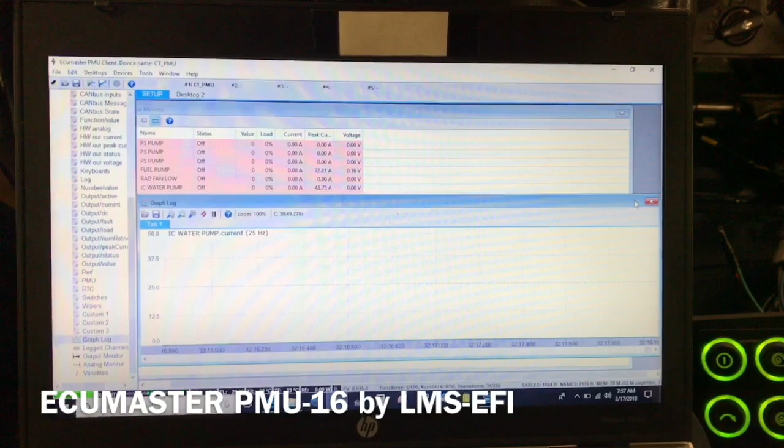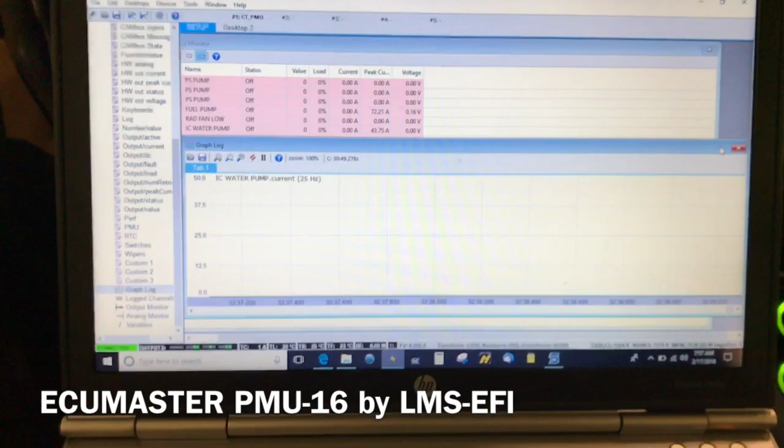Okay, we're having a little play with the ECUMaster PMU-16 today. I've got the software open here on my laptop. We're sitting in a 3rd gen RX-7 that we've been working on for a little while now. This car is using that PMU-16 power distribution module. We also have the ECUMaster switch panel here. We don't have it mounted yet, so excuse everything just kind of laying in here.

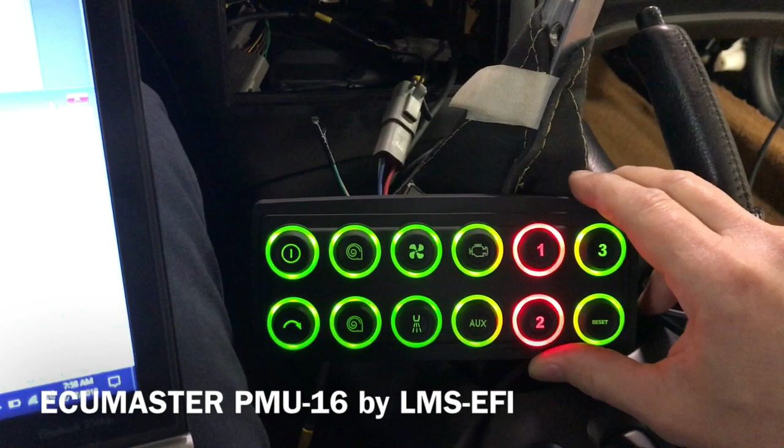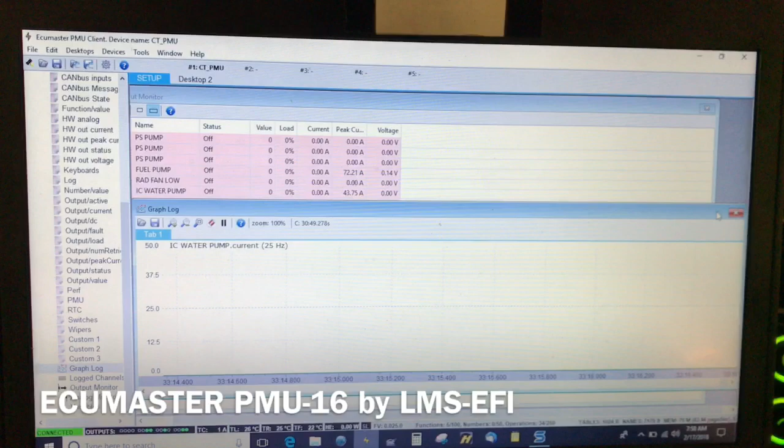We've been doing a lot of testing and just playing, really, seeing what features we can employ on this unit, and it's a pretty neat little deal. And I'm going to go over one of the features that we're using right now, and kind of how it works and what you can do with this software and this device. I'll try to pull this menu down. The laptop's not working. There we go. Pull this down, kind of zoom in here.

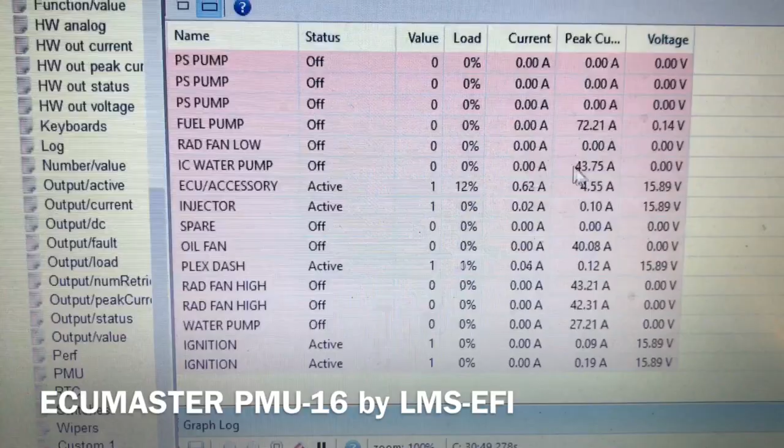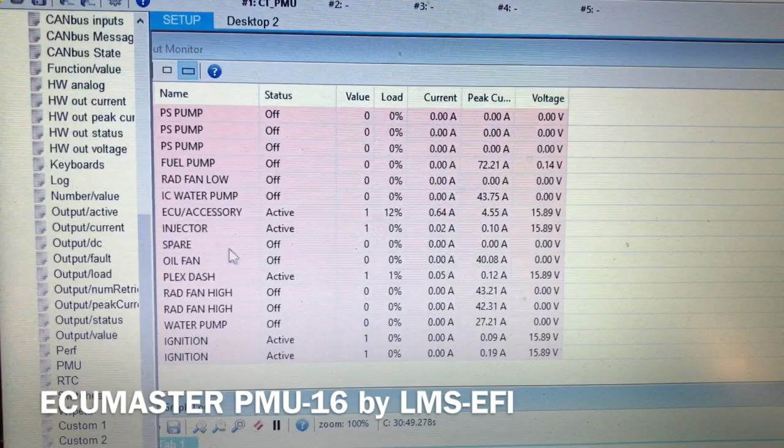You can see we're running a power steering pump, fuel pump, radiator fan, 2-speed radiator fan, intercooler water pump for water to air intercooler. Our ECU and accessories are on a circuit. Injectors, we've got one open there, spare. We've got an oil cooler fan, got a circuit for our Plex display dash, fan high, our electric water pump, and then we're running 2 circuits for ignition coils.

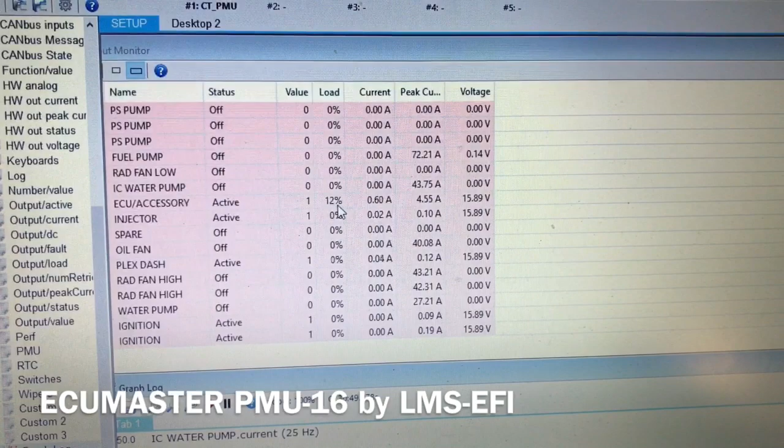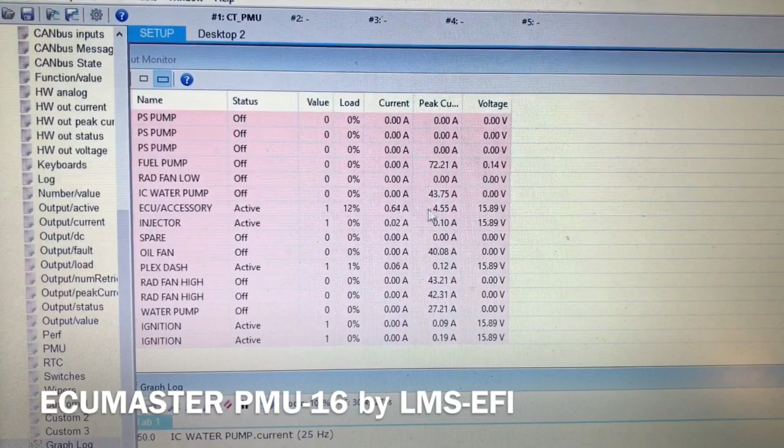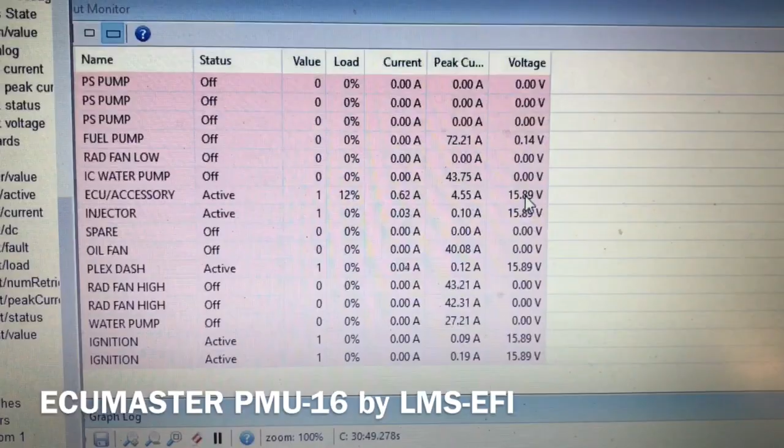As you can see, this will display whether or not the functions are on. See, active, off, the percentage of the programmed load that you're using. So right now, the ECU is using 12% of whatever the fused value that we have programmed, and you can see right now it's running at about 0.6 amps. Excuse me. And that's real time. Over here it's pulled a maximum of 4.55 amps, and it's running at 15.9 volts. I have a battery charger hooked up to this thing right now, so the voltage is hovering right up around 16 volts.

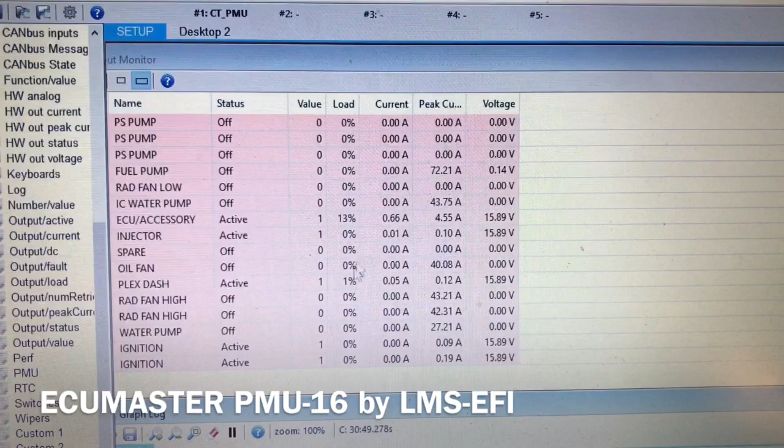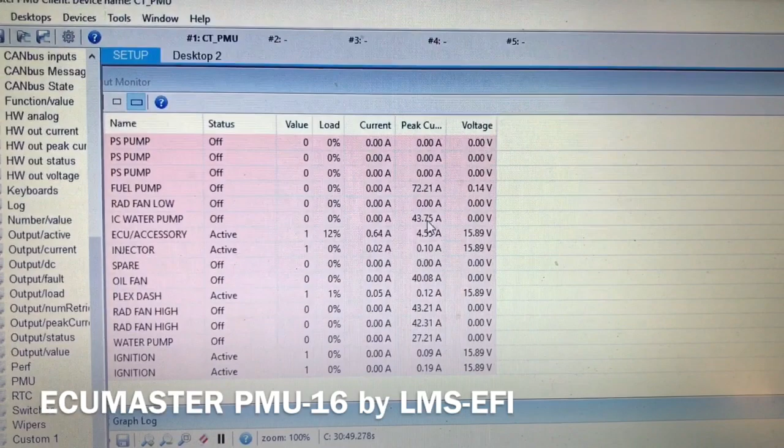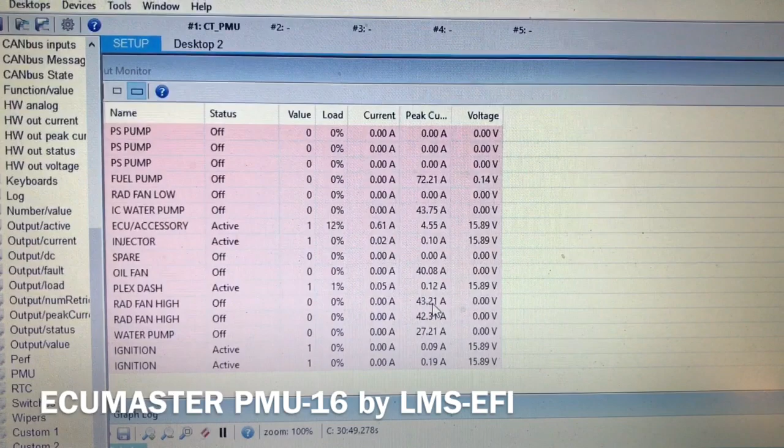What I'm going to show you, I'm going to use our keypad to enable the intercooler water pump, and as you can see, I have run that already, with a max of 43.75 amps, and that's inrush current. It doesn't run at that high of a current draw, but when you first turn it on, you're going to get a big inrush. And you can see the same thing up here with the fuel pump. The fuel pump primed and when it first came on, 72 amps of inrush. Down here, this radiator fan, we're using 2 25 amp circuits, so a 50 amp total continuous capacity. And on inrush, we got a little over 85 amps.

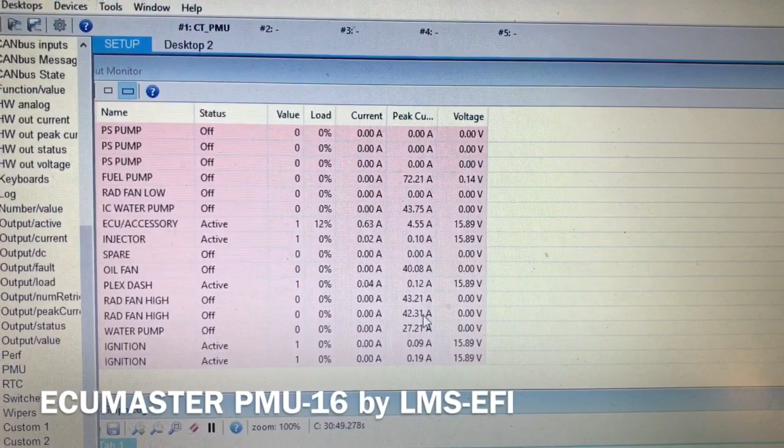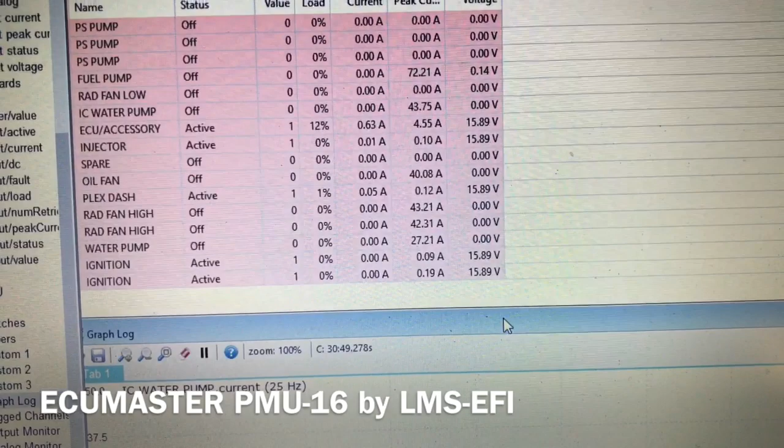Okay, so the inrush is big on these motors, and we can monitor that. The running current isn't going to be anywhere near that, but it's just handy to know exactly what these things are doing. So I'm going to pull this chart back up, zoom out a little bit here, and this is real time, and it's going to graph.

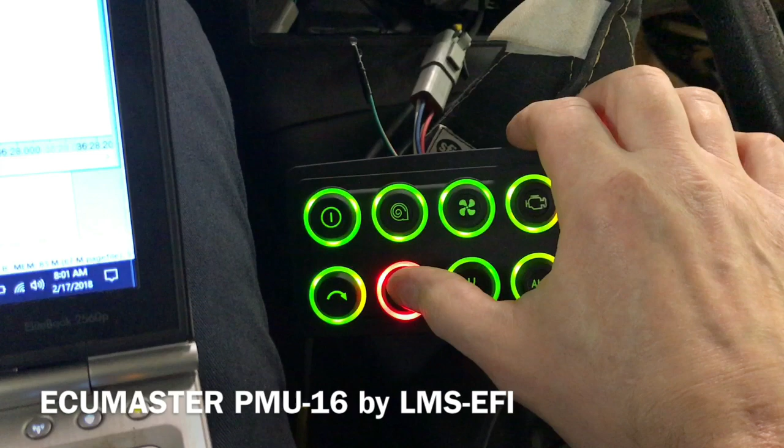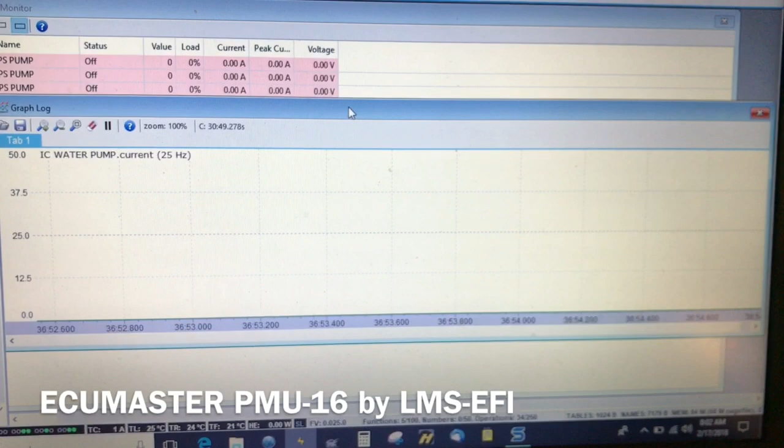I'm going to manually, over here with our switch pad, key this pump on and off, and you can see the state change on the keypad there. And I'm going to go back here, and you're going to see exactly what the real-time amperage does. You can see it spike up and then drop down and then go to 0 when I turn it off. And this chart, as you can see over here, is scaled to 50 amps. So again, I'll turn it on. We get our 40 some amps of inrush, and then the running current is very low.

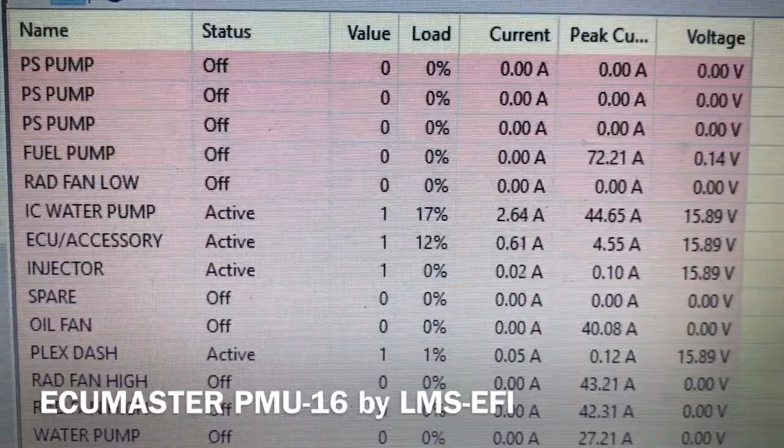Don't have any water in it right now, so that's not indicative of what this thing will do when you load it down with water. But then we can go back here and see that that IC pump is running at a little less than 3 amps. So big inrush, but the amperage drops right down. This pump, when I do load the system up with water, is probably going to run about 12-15 amps.

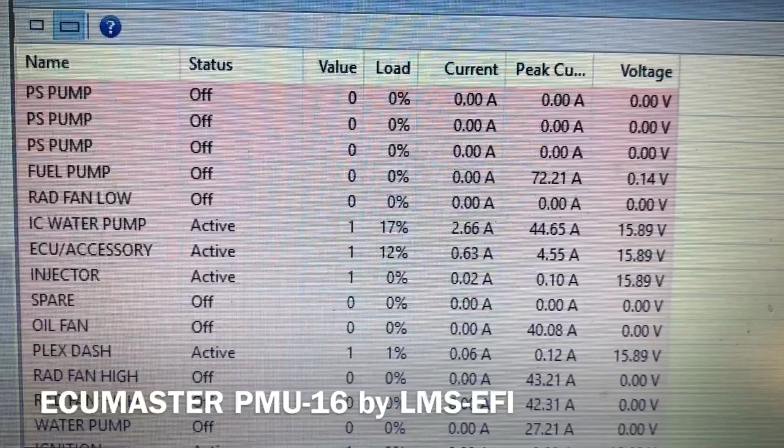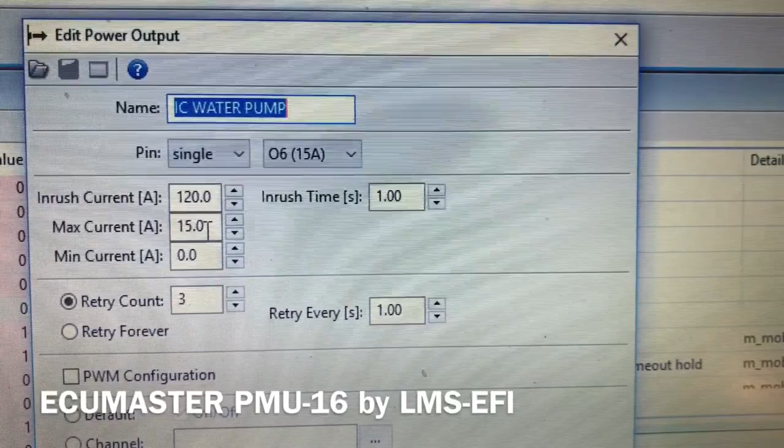And so then I'll show you here how we can control this. I'll go ahead and shut that pump off. I'll double click on this and our setup page for this function pops up. You can see up here that we got the IC water pump. We're using a single 15 amp circuit, and I have it fused for 15 amps. So if it draws over 15 amps, it's going to shut down.

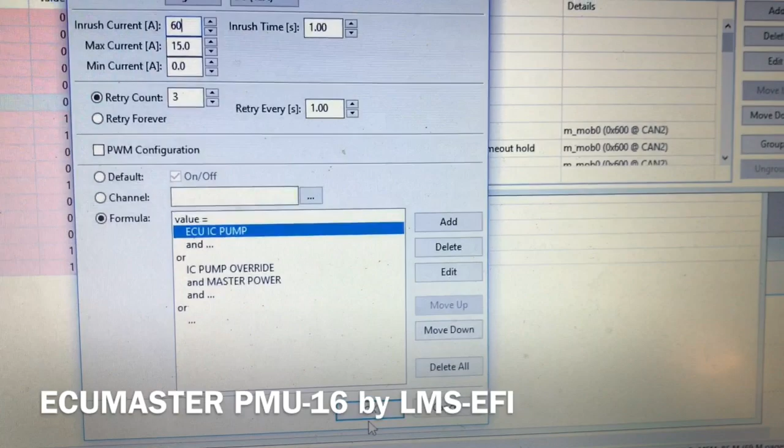We got 120 amp inrush set up. I'm going to go ahead and drop that down. We'll set that at about 60. Just to show you how everything's programmable. Go ahead and hit OK on that. Close that out. I'm going to bring it back up.

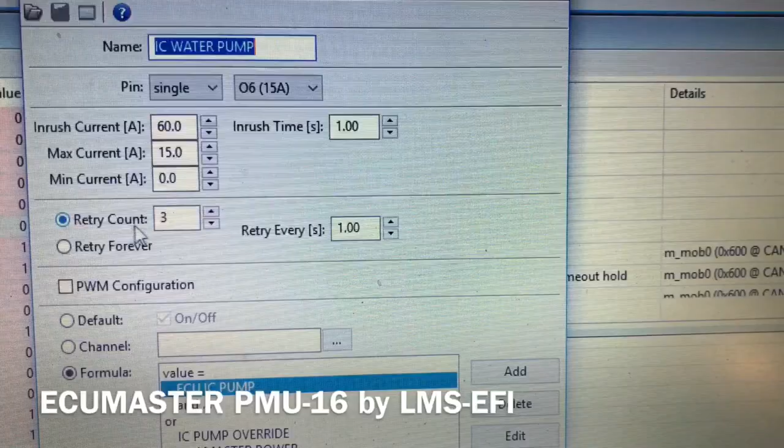Here we go. And the way this works, if you exceed your max running current, the circuit will go open, just like a fuse blowing. And then we have it set up to retry 3 times and retry every 1 second. So basically, if the fuse blows, it's going to replace the fuse, try the circuit again, and it's going to try it 3 times. And if after 3 times it still faults, then it's going to set a fault.

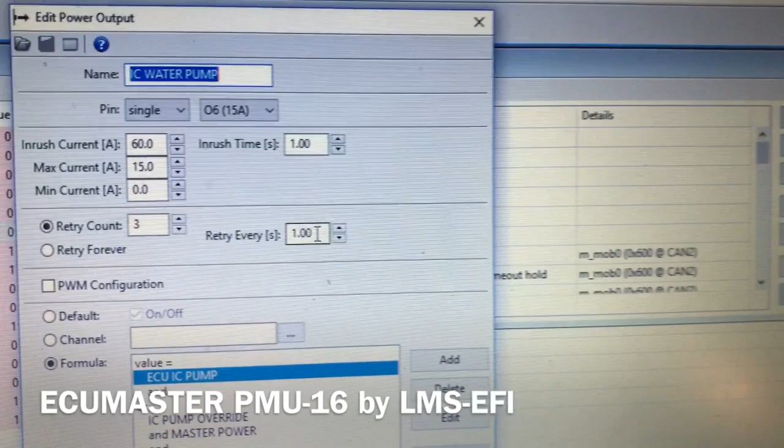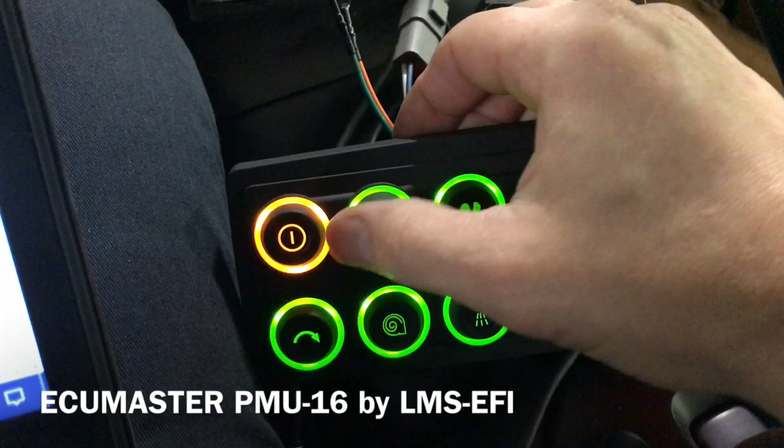The other things we have here, we have another indicator lamp here that is for again ECU faults, and this is more of a check engine light situation where you've got low oil pressure or something like that. These are manual override buttons, just like we had with our intercooler pump. Turn it on and off. And then this is a master power button. So when the master power button is off, the overrides are turned off. So that's how that works.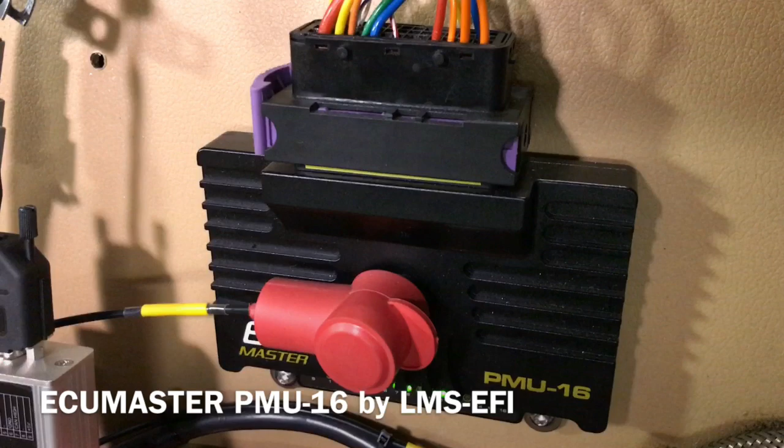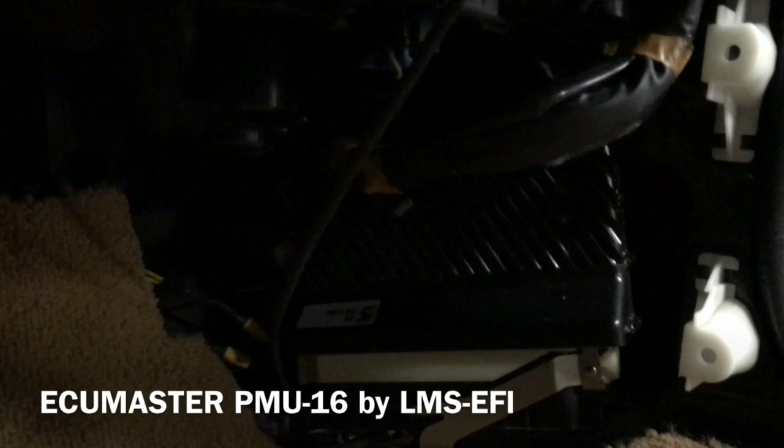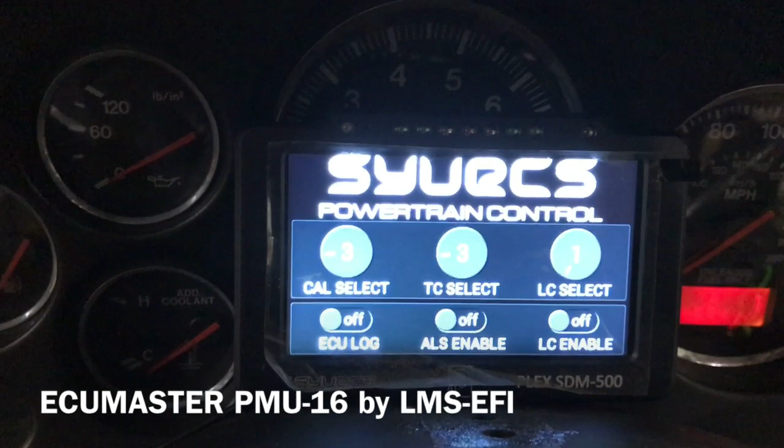And this piece here communicates with the PMU, and if you look down here, here's a little PMU power distribution module sitting right there. It's about 4.5 by 5.5 inches. Small little unit. Down here, if you can see, the lighting's bad, that's our Syvecs S8 ECU. And then come back up here, and you can see our Plex SDM 500 display dash. All of these units are connected via CAN bus.

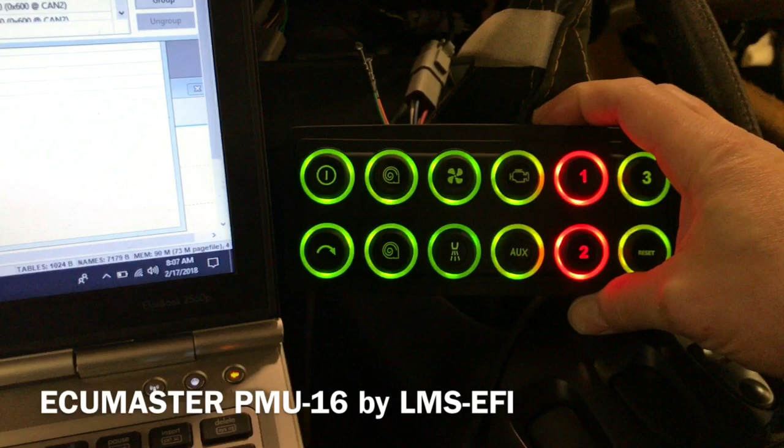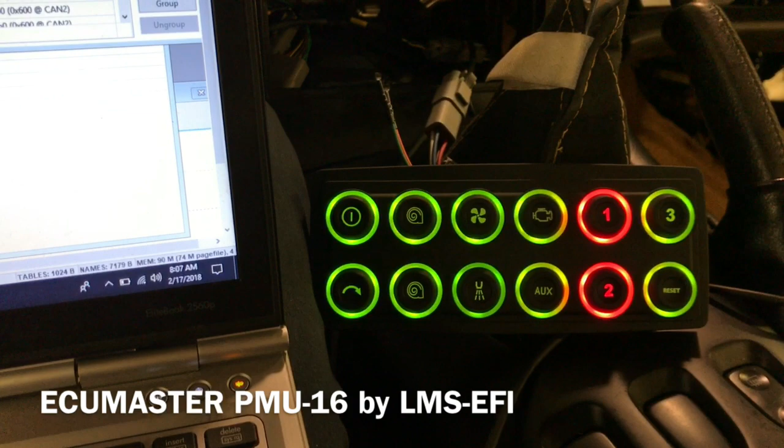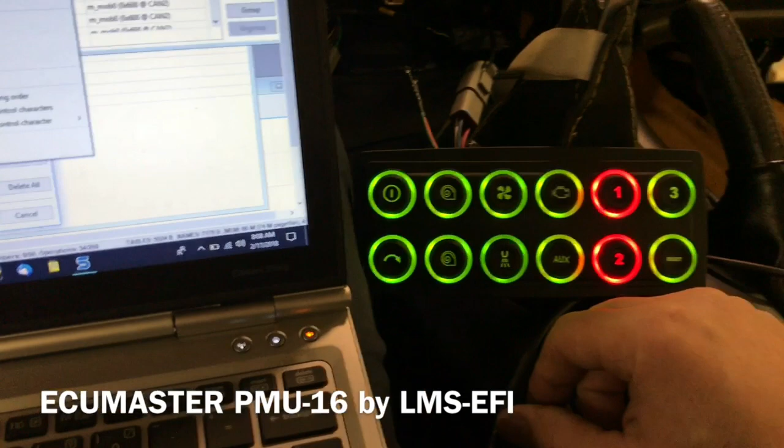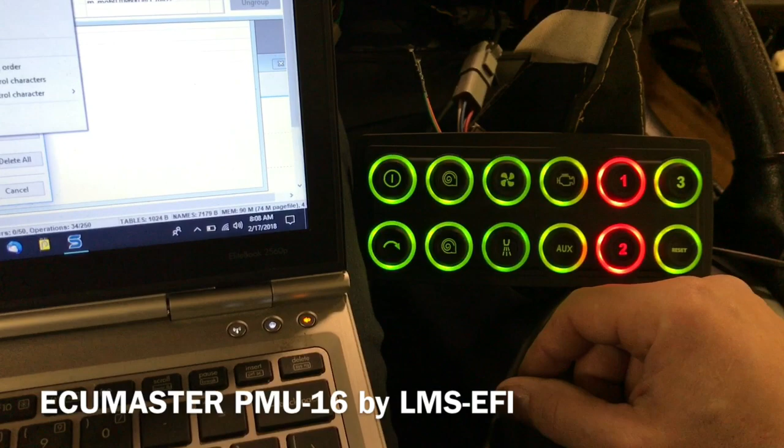The ECU features programmable CAN bus input and output, and so we can program what the ECU is putting out, and then the ECUmaster stuff can also be programmed, and the Syvecs stuff can be programmed. So we took some time, set up a CAN bus protocol where all three units can talk to each other. And so we have one set of sensors that feeds the ECU, the power distribution module, and the dash. And then we can set up fail safes and turn functions on and off in the PMU with the CAN bus objects.

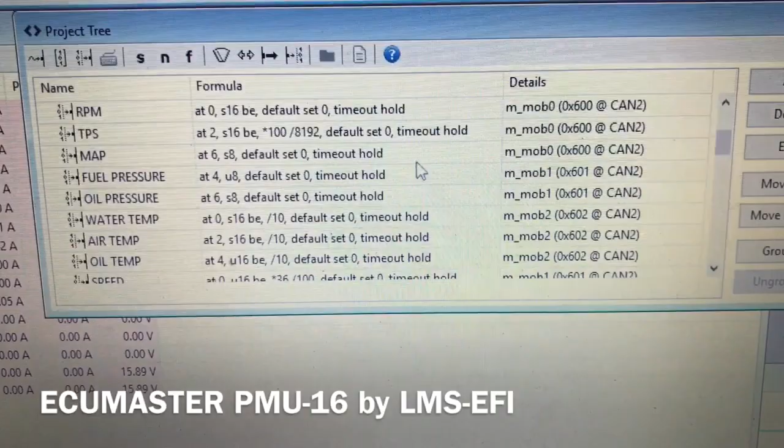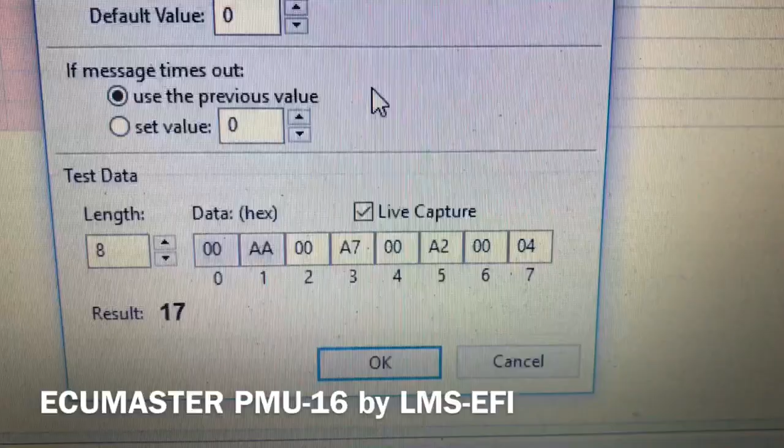And just to show you a little bit of how that works, we'll look at water temperature. Open that up and see the protocol here, I can set all that up. And another really neat feature about the ECUmaster PMU is that you get live CAN bus data, and so you can see down here exactly what's coming through on this channel and what all the hex information is in real time, and then this will spit out your output value. And right now we're looking at water temp, and we get a value of 17 degrees Celsius.

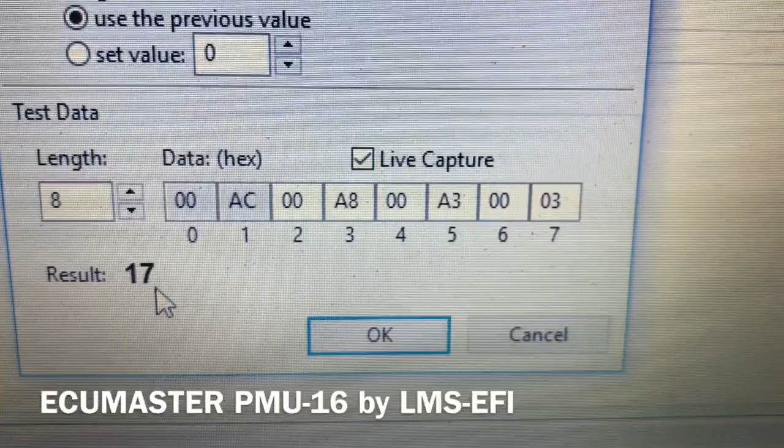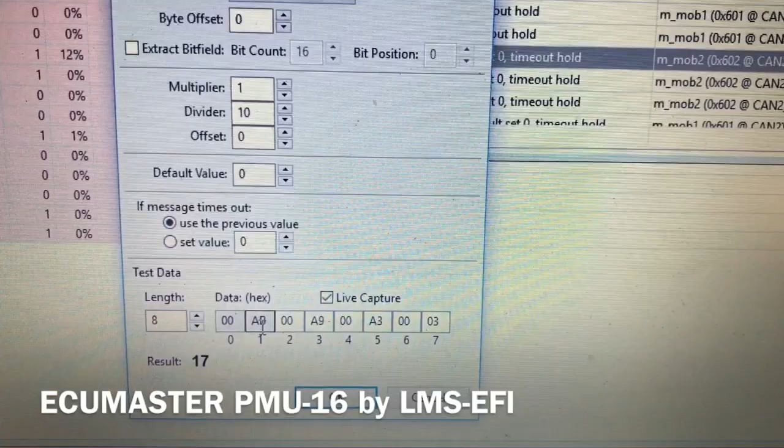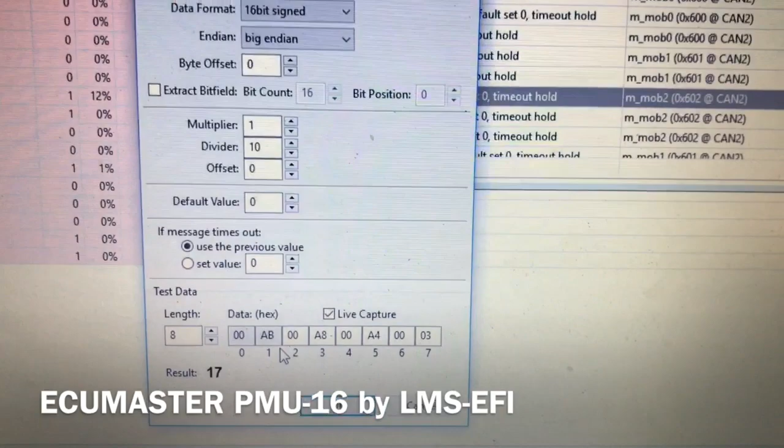So it lets you know exactly what you're reading. Actually what we had to do with the Syvecs was, we had the bit and byte information, but we didn't know exactly the multiplier and the divisor up here, how that was going to work to spit out the proper actual temp number. So playing with this, we can look at it and then come up here and play with our multiplier and divisor until we get the proper output number. So if you don't know exactly what the CAN protocol is, you can use this information to decode it and make your power distribution module work with really any sort of CAN bus.

And once you have that temperature information, then you can come back here and set up all your functions. And I'll show you an idea. Find the water pump. So we're running the water pump. It's an electric water pump. That is not what I wanted. It's the CAN bus info for that, for the water pump.

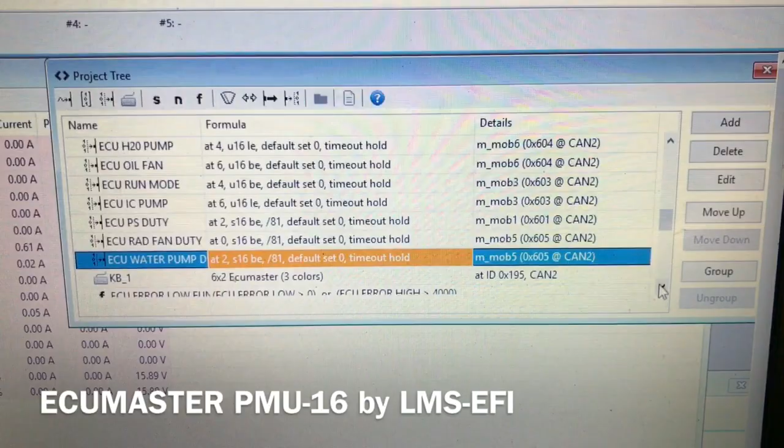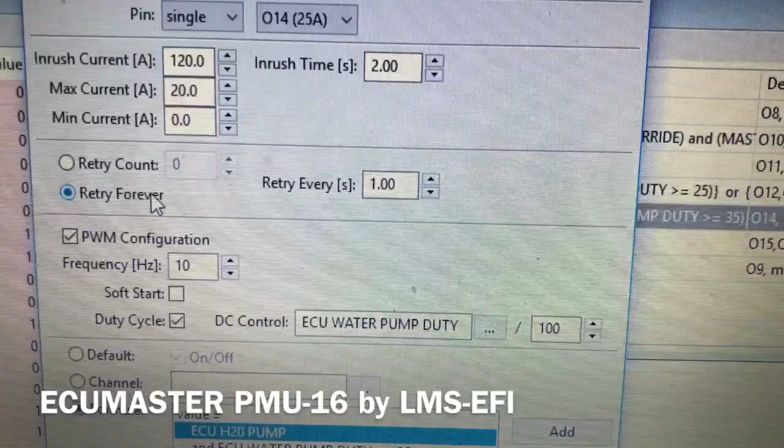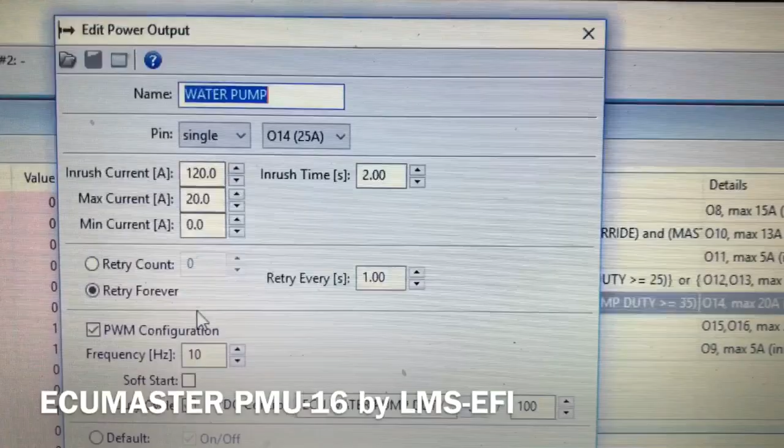Come down here to the water pump, and kind of like we went over with the intercooler pump, we got our water pump. It's a 25 amp circuit, 120 amp inrush, 20 amp running current. We have this one actually set up to retry forever. So if you exceed the max current and the circuit goes open, it's going to continue to retry it until you shut the motor down. That way, with the water pump, it's kind of important. If at all possible, we want it running. So that's why we have that set up that way.

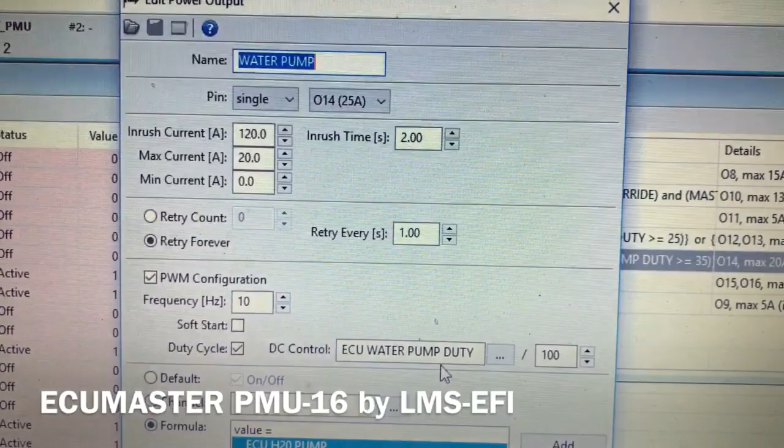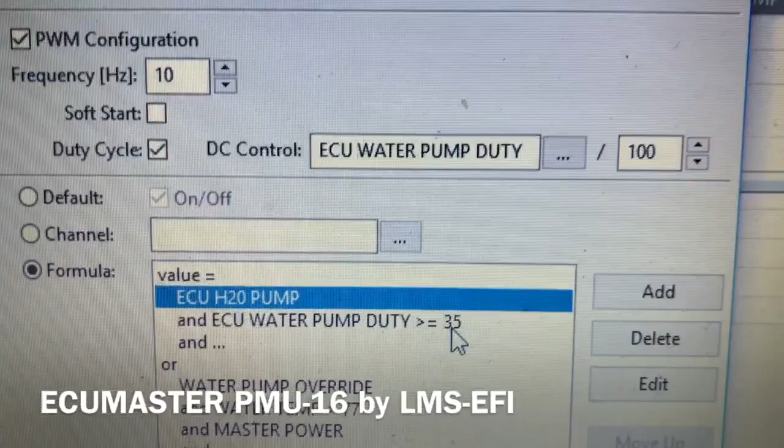We're running the water pump in a PWM manner. The ECU is set up to output a duty signal based on coolant temp, and we've got that set up in our CAN bus. It gets the duty number out of the ECU and drives the pump that way. And then down here, this is how we turn it on and off. The ECU turns the circuit on, and then anytime the duty cycle is above 35%, the pump will run. 35 is kind of the lower limit of what that pump will run. So anything less than that is ignored. The pump stays off.

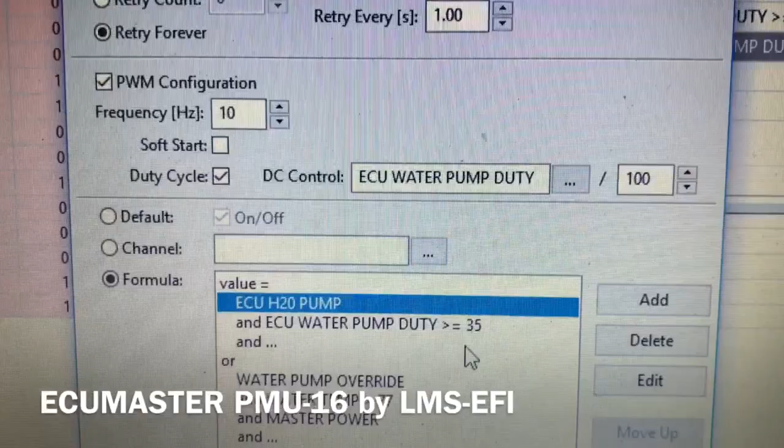I believe we have the ECU programmed to start feeding a duty signal at about 120 degrees Fahrenheit. So as the engine starts warming up, the pump starts turning slowly, and then by I think it's about 175 degrees, we're full on running the pump wide open. So that's the primary control, the automated control through the ECU.

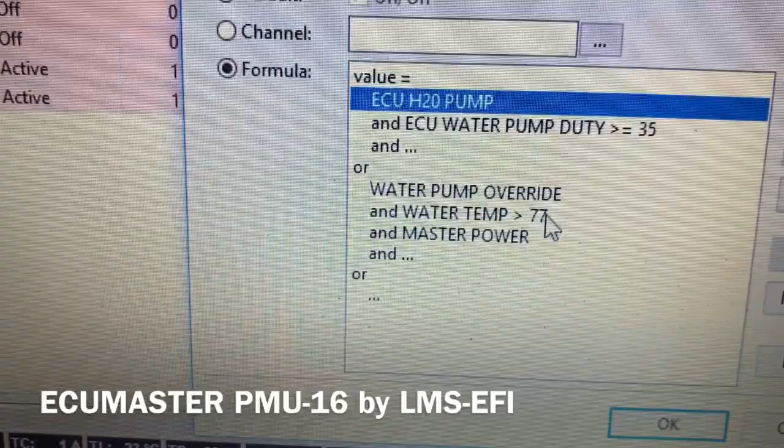And then down here we also have an override switch on our switch panel, so that we can manually run the pump. If we stop the car between rounds, we can turn that manual override switch on. The pump will run as long as the water temp is above 77 degrees Celsius and our master power switch is on. So that's the way that works. So you can park the car in the pits, turn the master power on, let the pump run, and then we have the same thing with the fan.

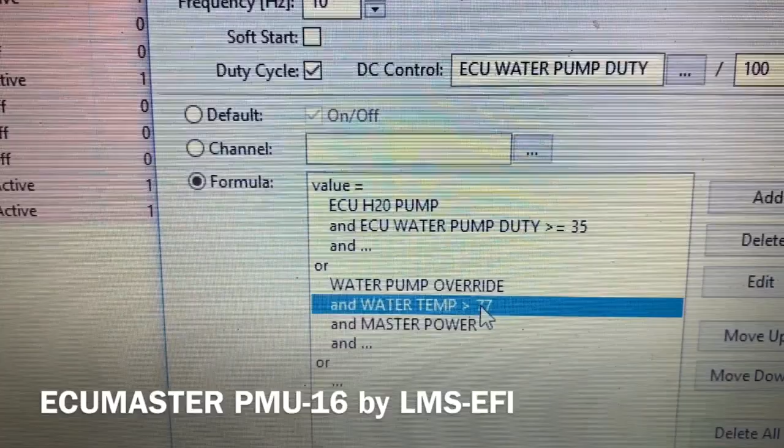So you come in, the car's hot, you want to cool it off, you turn everything on, walk away from it, forget about it, and once the coolant temp is down to 77 Celsius, everything shuts off. If it sits there and heat soaks a little bit more, and the temperature rises up a little bit, it'll kick back on. If you walk away from it, you don't have to worry about everything running continuously forever until the battery's dead. It will shut itself off.

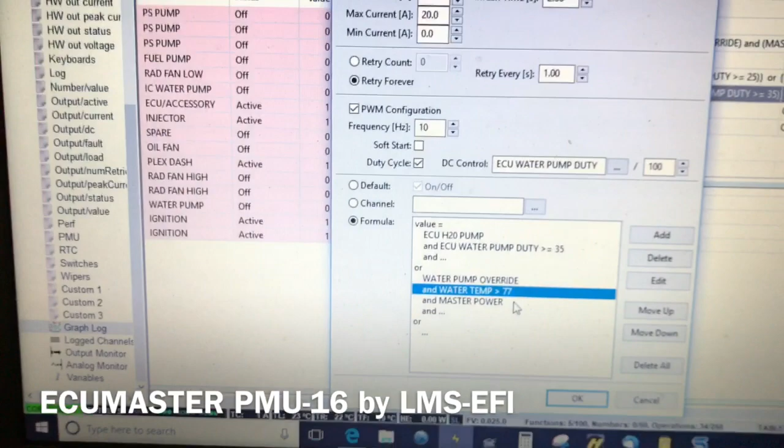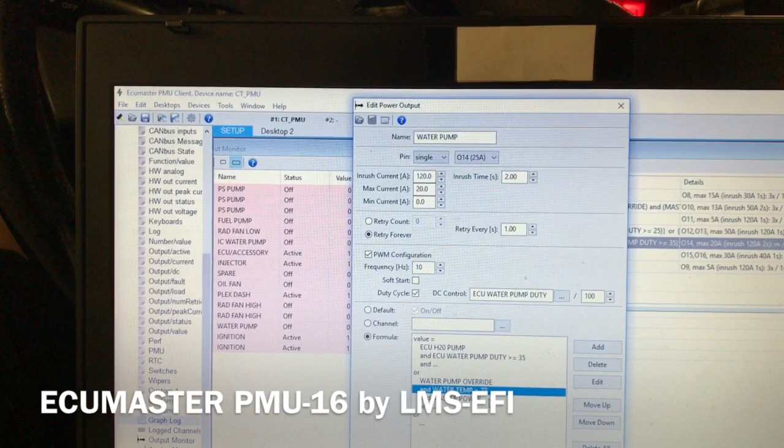And that is kind of a basic overview of what you can do with this stuff. There's just a lot of capability, and between the Syvecs ECU being able to output duty signals and frequency signals, basically anything you can dream up, you can do it. And the Syvecs can send those signals out over the CAN bus. The ECUMaster PMU is then capable of reading them, and you can just do all sorts of things. And basically, the sky's the limit. If you can dream it up, you can make it happen.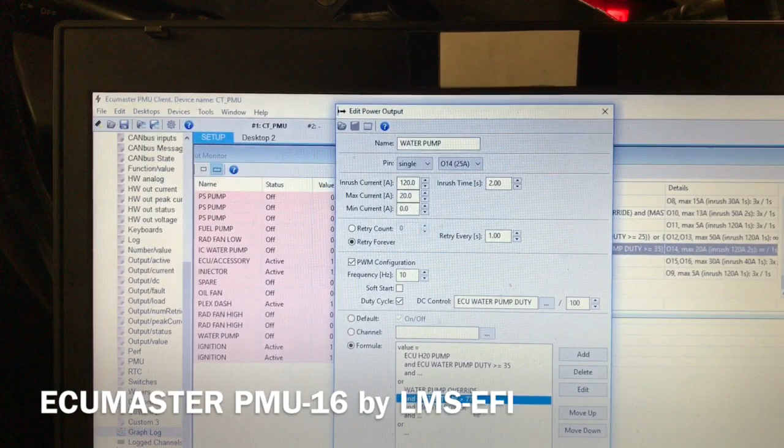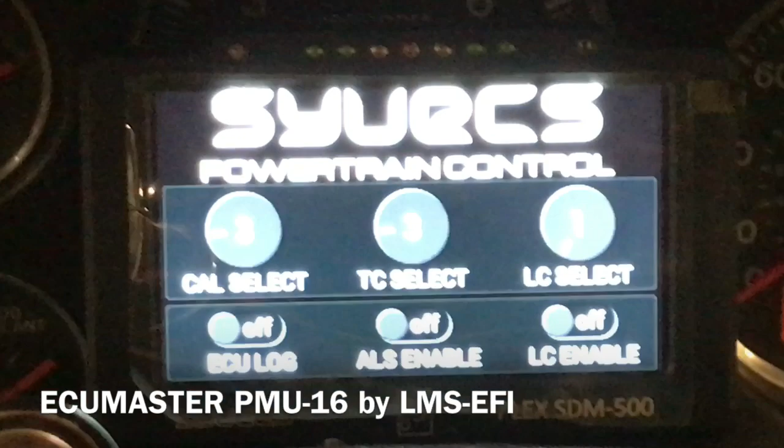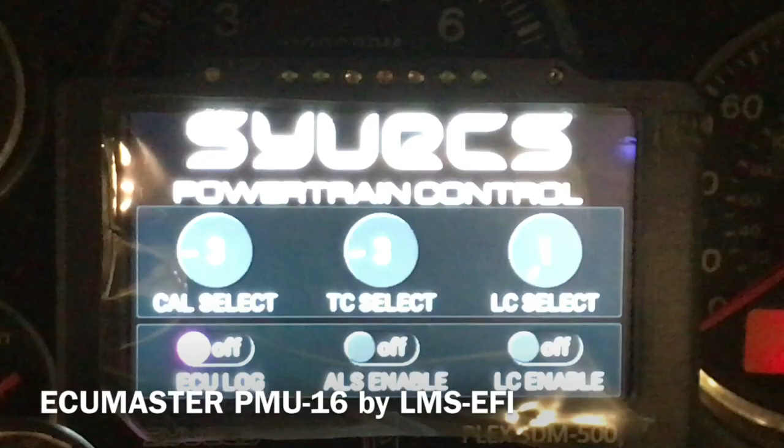One last thing I wanted to go over. I wanted to look at this Syvecs, or excuse me, the Plex dash, and it's probably going to give me a hard time here as far as contrast, trying to film it, but the Plex dash, you can see those buttons highlight. The Plex dash has a little toggle button here.

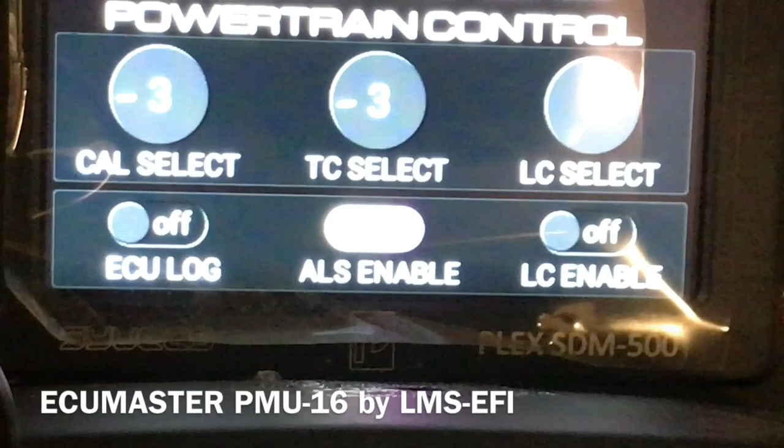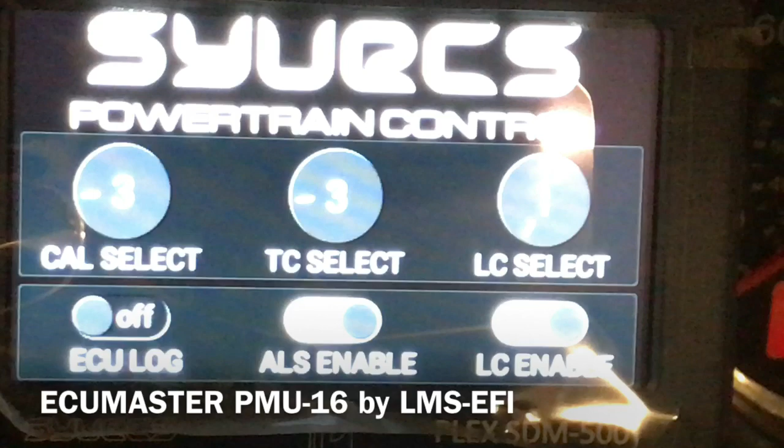You can see it's got a wheel that you can scroll by hand, and when you change it, you can scroll through different functions on this dash. And right now I'm turning functions on and off with this dash. And here we can make cal selections, and I'm going to cut this.